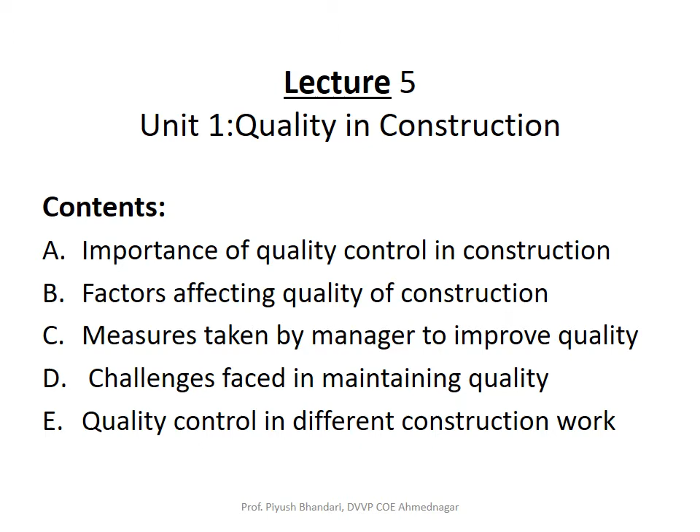Hello students, in this lecture of Total Quality Management, we are going to see following concepts. First is importance of quality control in construction. Second, we'll see factors affecting quality of construction. Third, we'll see measures taken by the manager to improve construction quality. Fourth topic, we'll see challenges faced in maintaining construction quality. And last, we'll see quality control adopted in different construction work.

First, we'll see importance of quality control in construction. Now, quality control in construction will help to construct as per the plan by following all the industry guidelines, that is standards, and adapting engineering practices. Organization is generally found to prefer quality instead of the quantity or the price, along with the two other important factors, that is safety and economy.

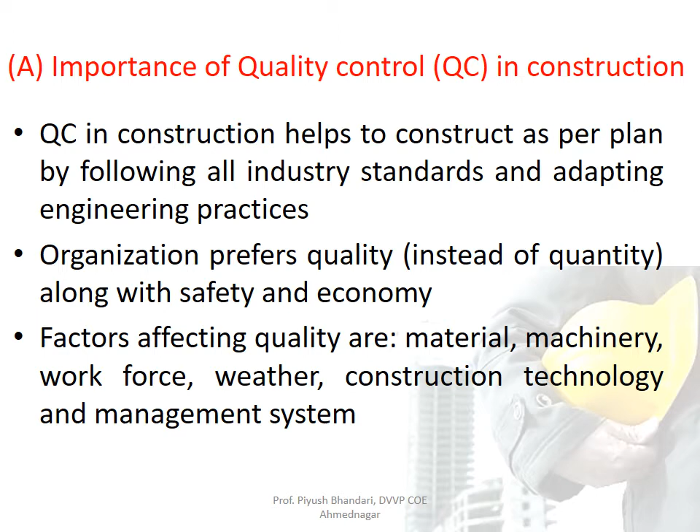Factors which affect the quality are material, machinery, workforce, weather, construction technology, and management systems. Poor quality will cause structural failure. It may affect the building utility services and reduce the durability of the structure. Quality control means we are providing or fulfilling the owner requirement. The construction will be completed within the time by avoiding any disputes and satisfying the specifications which are mentioned in the construction contract. Also, the building must perform its intended or the design purpose.

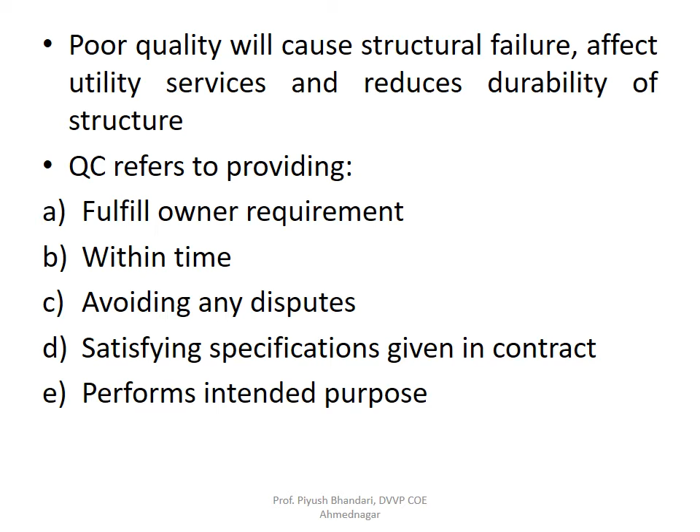Second point we are going to see is factors affecting quality of construction. First important factor is workmanship. It is observed that poor workmanship will cause human error. Now, the causes of poor workmanship are poor project management team, lack of the skill and experience in the workers, lack of communication between the workers and their superiors or the junior engineers, then use of unsuitable old machineries, presence of poor weather conditions, use of poor quality materials, and lack of time and funds. These all are the factors for poor workmanship.

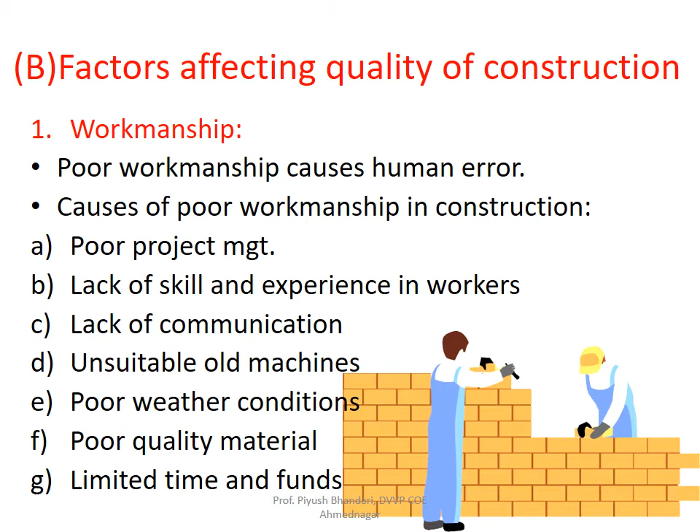Now, in order to reduce the workmanship quality problem, we have to adopt strict supervision so as to keep the watch on the performance of the worker. We should provide adequate training to the workers as well as to their supervisors. We should try to develop a communication link between the workers and their immediate superiors, that is, the supervisors or junior engineers. Try to adopt a proper construction and manpower management team.

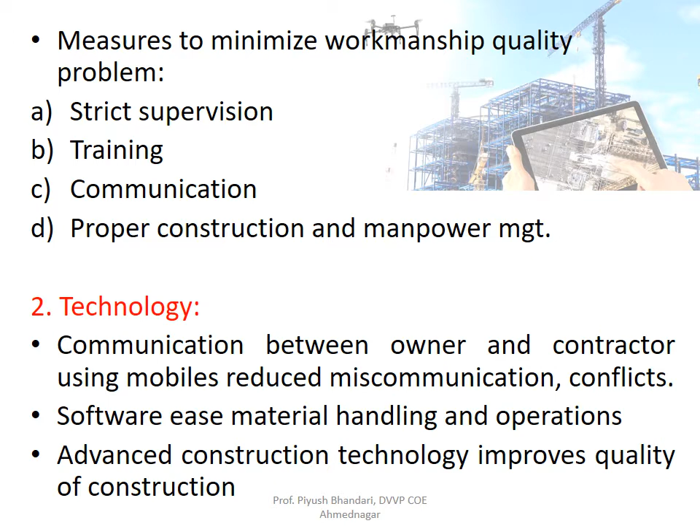Second factor affecting the construction quality is technology. Now, the use of communication between owner and the contractor through the modern technology, that is, use of mobiles, will avoid any miscommunication or further conflicts. Software will help in material handling and operation procedures. Adopting advanced construction technology will help to improve the quality of construction. Third factor is design. It includes use of architectural plans, structural drawings, design codes, standards, and Indian standard specifications.

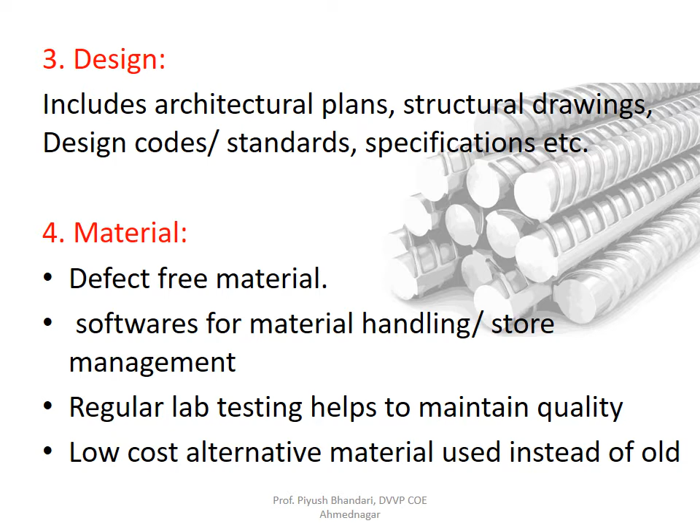Fourth factor affecting construction quality is the material used. Try to use defect-free materials. Using software will help during material handling and store management. Adopting regular lab testing will help to maintain the quality. Now, we can try to use low-cost alternative materials instead of the old or the conventional materials. Fifth factor affecting the quality of construction will be the contract. Try to adopt a proper tender drafting and awarding system. Then try to mention all the clauses and clear conditions in the tender document. Prior to construction work, try to solve any conflict which may arise during the actual construction process.

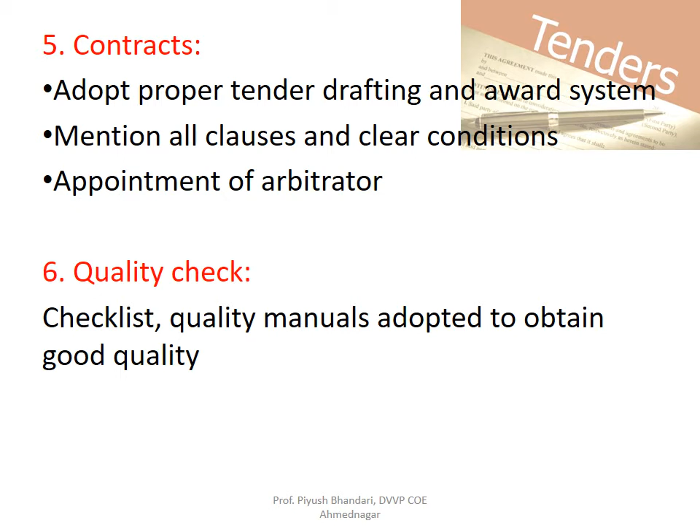Sixth factor affecting the quality is quality check. Checklists and quality manuals should be adopted for obtaining good construction quality. Seventh factor is adopting training. It will help to increase the labor productivity and quality of construction. Eighth factor is financial issues. So try to maintain regular and weekly labor wages. Clear all monthly, quarterly, or weekly bills. Maintain a contractor cash flow document.

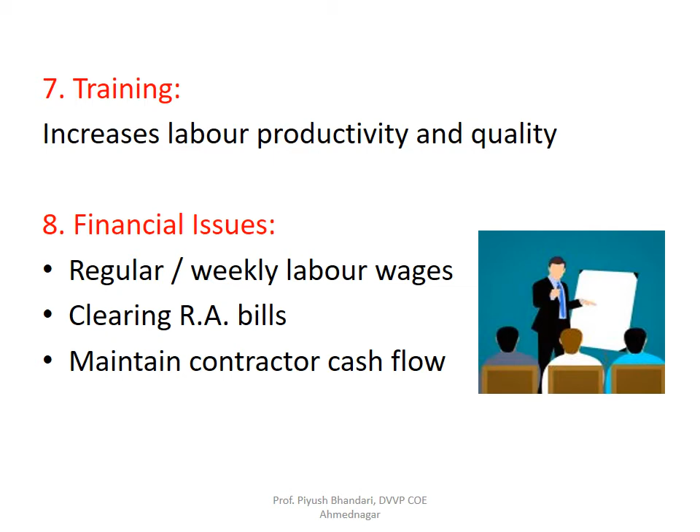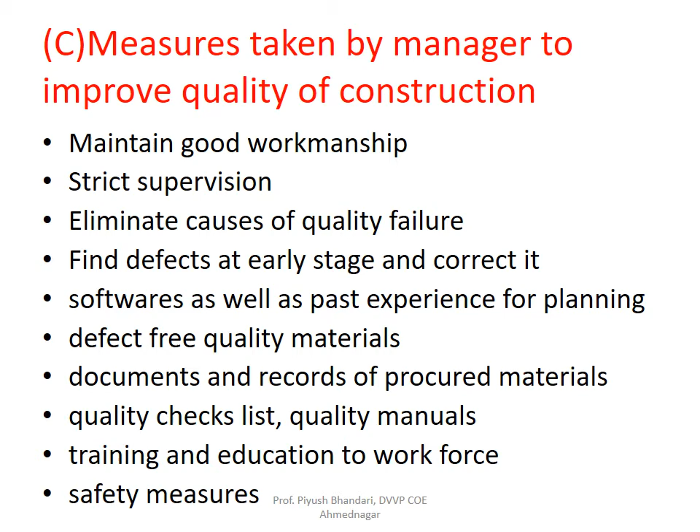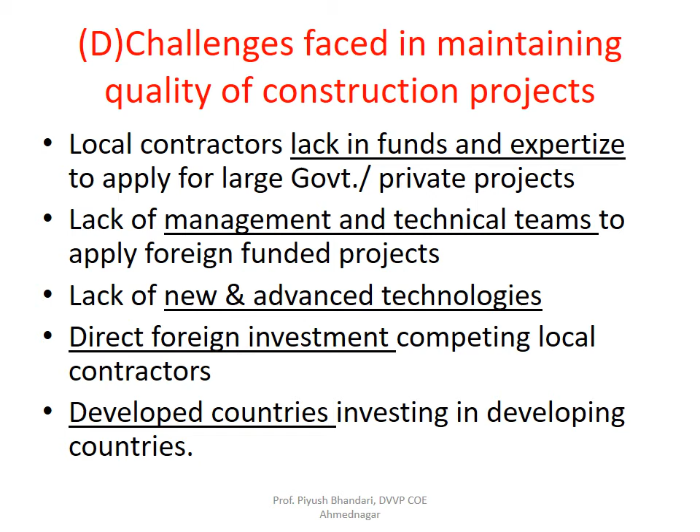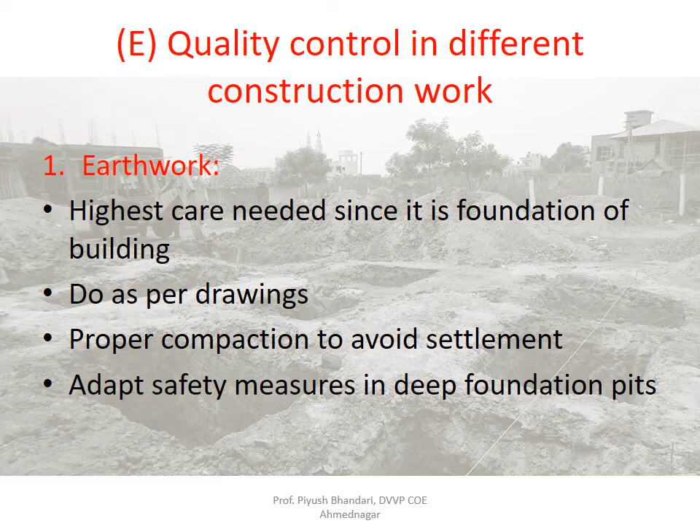Next point to see is the quality control measures adopted in different construction work. First important construction work is foundation earthwork. At this time, high care has to be taken because it is going to serve as the foundation of the entire building. The earthwork must always be done as per the provided drawings. The excavation pits should be exactly as per the drawings. It is important to do proper compaction below the footing so as to avoid any further settlements. Try to adopt adequate safety measures in case of construction activity in deep foundation pits.